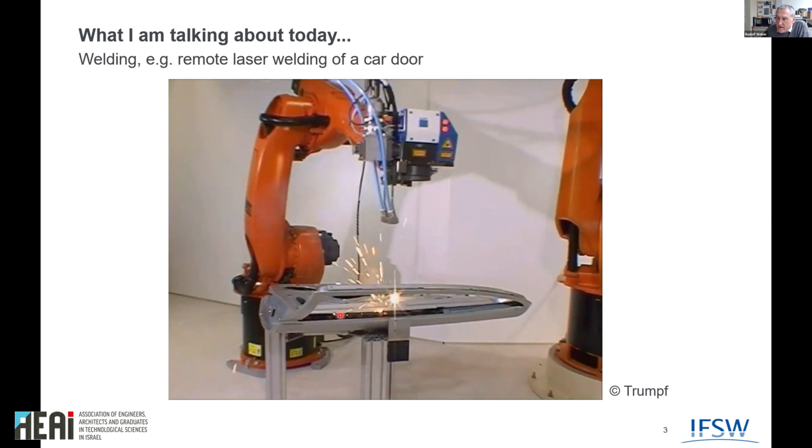Today it's mainly about welding, laser welding. This is a typical arrangement, from a film which was made by Trumpf a few years ago. We have the laser standing somewhere, and a light cable where the light goes into the processing optics. We have some protective gas here, and then at quite a big distance, up to a meter maybe, we have the sample. In this video, it's a car door which is welded, and that's how it looks. If you look at the process, the whole system moves around, and wherever it's getting bright, you see that welding is being done. Of course, today it's interesting to have a closer look at what is going on here.

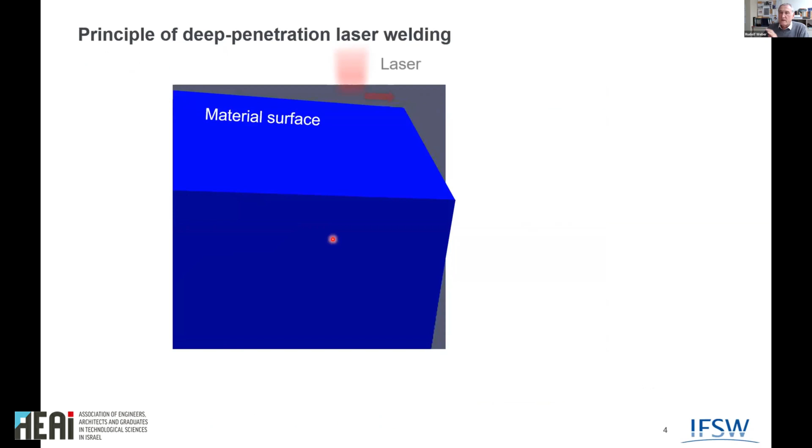As you might not be that familiar with this process, this could be the car door. This is the surface. We have the laser coming from top and moving slightly to the right. Let's go back again, because it looks nice.

Then you can see that we create some metal vapor. The laser heats the system up to boiling temperature. We create vapor, and the vapor pressure presses the melt away, creating a kind of capillary, as it's called. What is important with this capillary is it's quite deep, and if you look at the laser as rays, you can see there are multiple reflections inside this capillary, which means almost all the energy in the laser beam is coupled into the process, making it very efficient and very useful for deep welds.

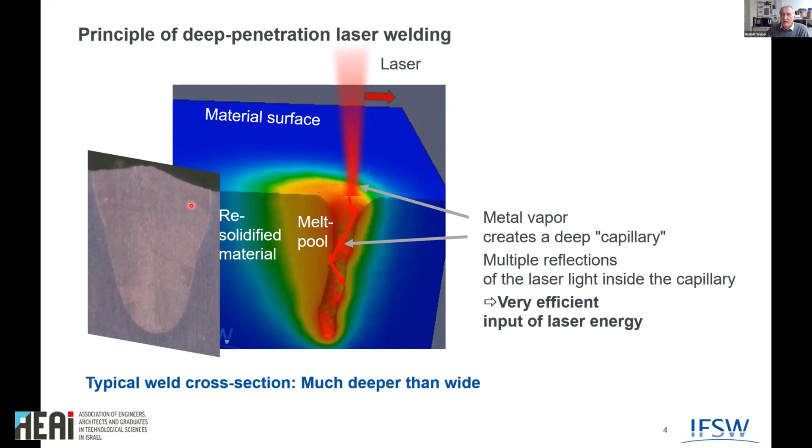We have some melt pool where the material is molten, and then after a certain time, during the movement, it resolidifies, and what we get is a weld seam, which might look like this. This is a typical cross section of a nice weld. This is the surface, where the material was molten. What you can easily do with laser is make it much deeper than wide, and this can be done very fast.

This introduction shows laser welding is very nice. It's a very useful process, and it's also very often used in industries already, as you might have seen with the car door. But it's also very challenging. If you look a little closer, you see there are a lot of fluctuations, which might yield wrong welding depths or wrong cross sections of the joint. This is one of the issues.

The other thing, if you look a little closer, you can see there is a nice crack building up at the end of the weld. Of course, usually you don't want to have such a crack. And also you can see there are big and small spatters emerging from this bubbling liquid, which is the metal surface. In my talk, this is more or less the contents.

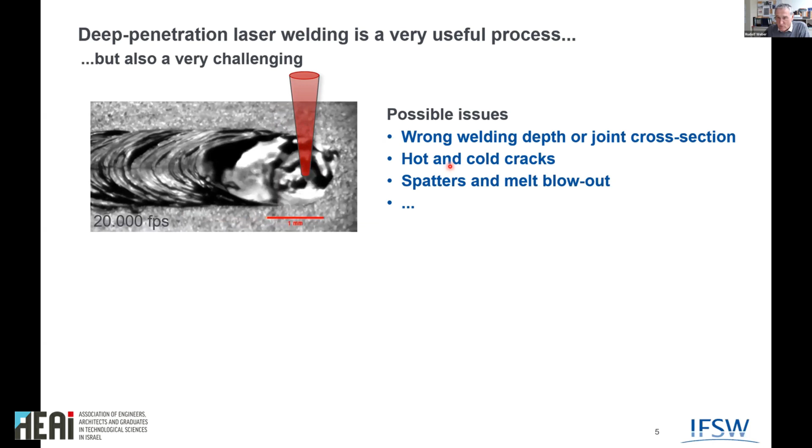I want to say a few words about these three topics, and of course, what's going on with the laser beam. If you have a closer look, today a typical standard parameter set has the laser focused with some top hat or sometimes Gaussian intensity distribution. This is really common, that's usually done. And on the other hand, the laser beam just moves linearly over the surface and doesn't make any additional movements or any additional power or intensity distribution changes during the weld.

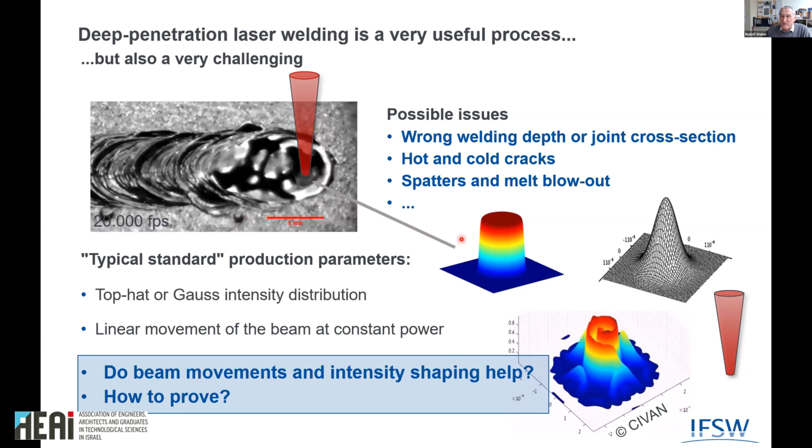What is interesting today is, does it help if you start moving the beam, or creating fancy intensity distributions to influence your process? And one of the questions is, how can you prove that it helps? For this, we are in the happy situation at the IFSW that we have what we call the IFSW X-ray facility, which provides insight into the process.

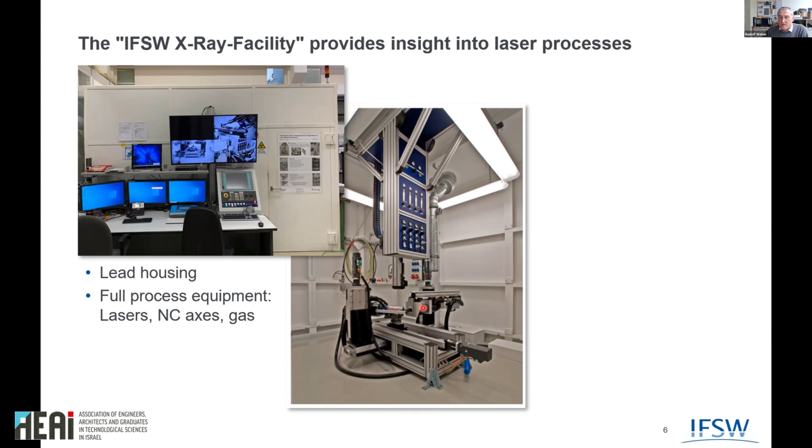This is a lead housing, quite big, with the commando, the operator's stage here. It's made of lead. Inside we have full process capabilities, including laser. Here the yellow thing is the light cable. Here the process head would be, and a lot of axes to move everything around. We have gas supplement to also work with process gases.

What is really nice about this is we have an X-ray tube, a point source X-ray tube, and a scintillator with a high-speed camera where we can X-ray the whole process during the process. And of course, we have other things like high-speed cameras, and finally we do image processing to understand what is going on.

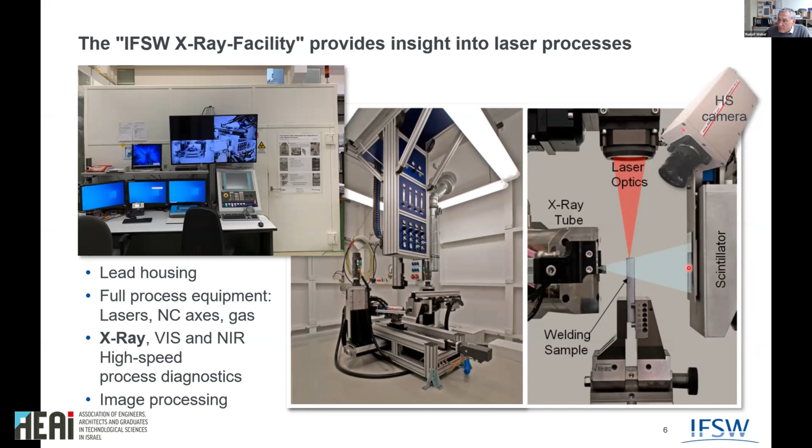And that's how it looks like. Let's go back one picture, sorry. Here you can see this is a typical sample. This is the surface, the laser comes from the top, the X-ray comes from the side, and the high-speed camera looks from the top. So what you can see here is the surface of the sample. In this case, it was aluminum.

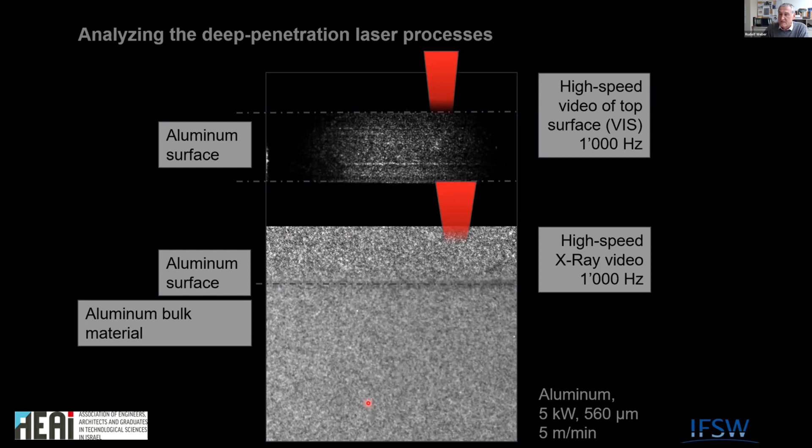And what we see here is the X-ray video, now also at 1000 Hertz. That's how it looks like. This is the laser beam coming. You see on the top, you get an explosion. The process starts, and we get a nice capillary.

So whatever is brighter, material is missing. What you can see is the capillary I've explained just before. Here the laser beam is coupled into the capillary and the system is heating up. That's what you can see now, that it's very fluctuating. We can see that whenever it's bright here, it's a kind of bubble or a kind of pore finally.

You might also see that the contrast is not very good. That has something to do with the complete X-ray system. Therefore, we have here a drilling. This is a mechanical drilling, which is filled with tungsten powder, which does not melt. And what you can visualize now is what's going on inside the melt.

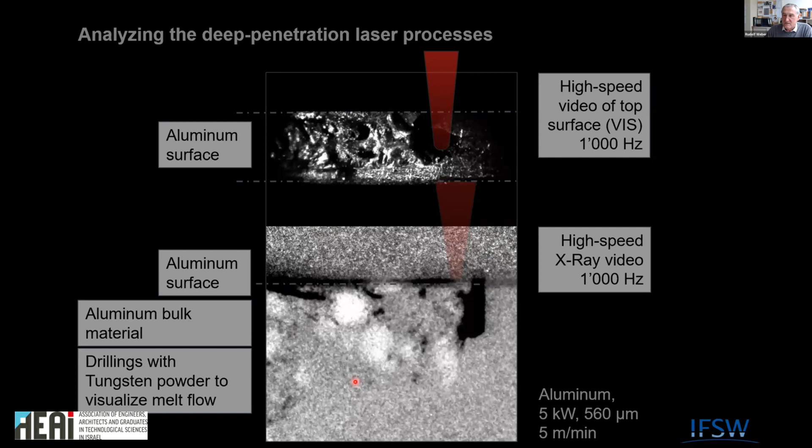So you see, whenever we go with the beam through this tungsten powder, you can really nicely see how chaotic, let's say, the whole fluid flow in this hot molten aluminum is, how you create eddies, and also how you create a lot much of pores. So this is an idea. You will see today a lot of such images and pictures that you get an understanding where we come from.

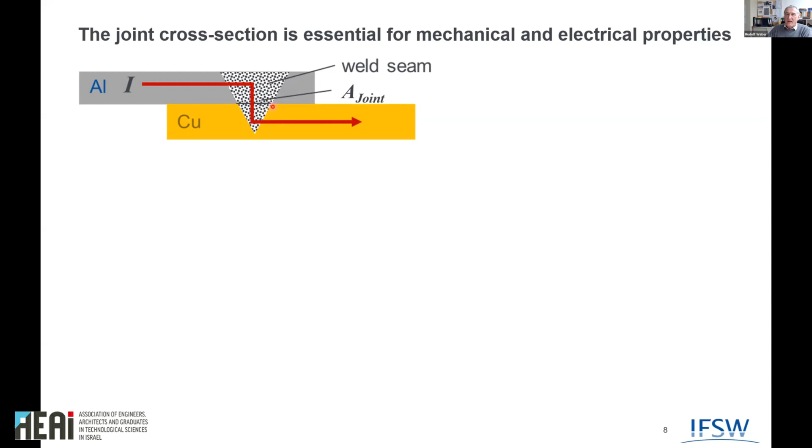So come now to what is the benefit of beam shaping. The first very, very simple example is shown here. This is one of the typical automotive applications of today. You have some aluminum sheet which should be welded to a copper substrate. And of course, the cross section here at the interface between the two metals is essential for the mechanical and the electrical properties of the whole system.

And if we have now this straight moving beam shown here as a sketch, this is what we end up with such a weld. So this is a cross section, the same as here, this grinded, that you can see what is going on. The darker material here is the aluminum, on the bottom the brighter is copper. And this, what you can see here, is the laser weld which was done. This was already a very nice and very good weld. You can see that only a few copper is molten, which is important to have a good conductivity.

But what you also can see is that the cross section is quite small, and also that the copper is distributed all over the weld. And now what you can do is the most simple beam shaping, or one of the most simple beam shaping things, is you do wobbling, which means that during the moving of the beam, you have an additional movement of the beam perpendicular to the direction of movement.

So this then ends up with a quite wider weld seam. Here are the parameters for those who are interested. You can see that the beam is moving here from left to the right, while the whole beam then is moving from bottom to top, while the whole thing is moving to the right. And this is how then the weld looks like. If everything is adjusted well, you can see that...

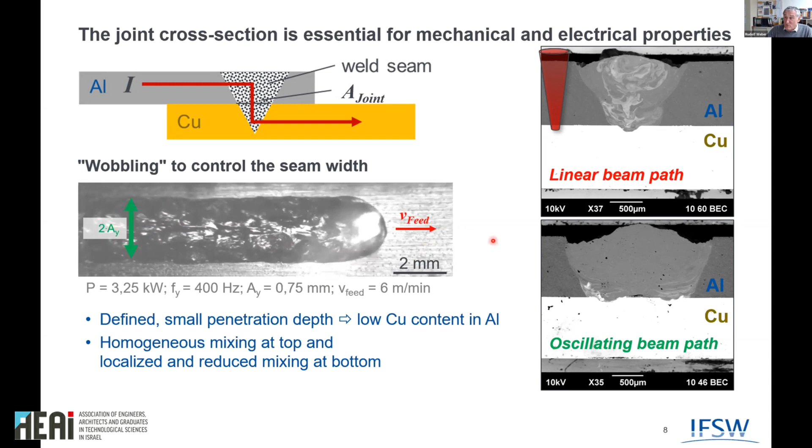If we just wobble, nothing happens. So it's really important to have the correct parameters. So we have a defined penetration depth, much more defined than here, and we have quite homogeneous mixing, which means we can really improve the mechanical and the electrical properties of such joints.

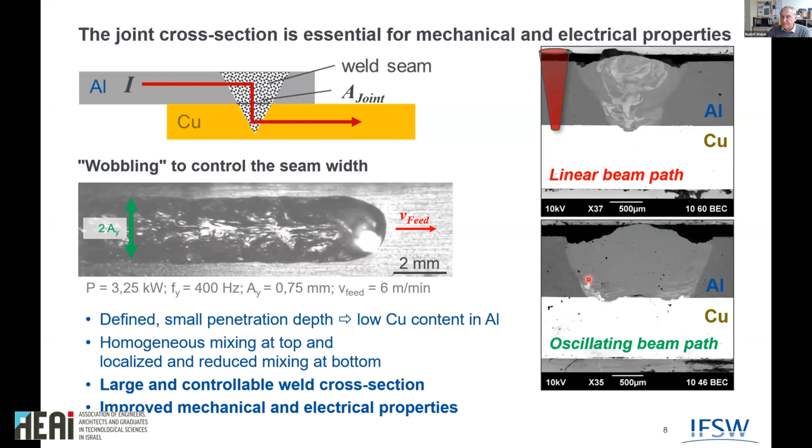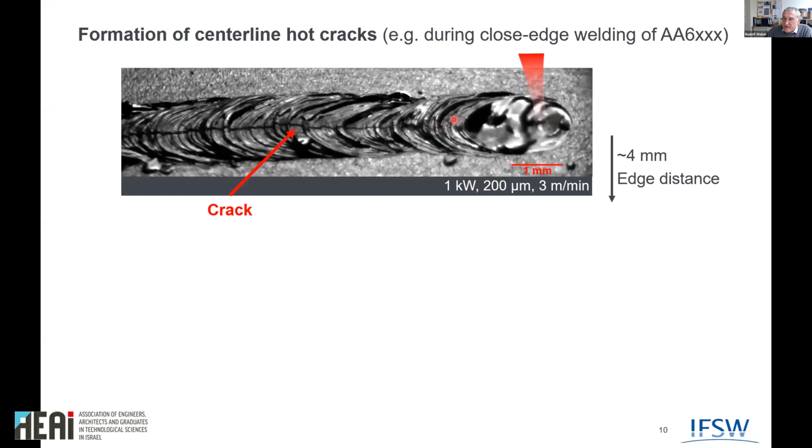The second thing I would like to show you is the formation of hot cracks, which is also a quite important issue that mainly happens if you do close edge welding of aluminum alloys, which is mainly in car doors. Modern car doors are made of aluminum. If you are close to the edge in a few millimeters distance, that's what happens if you do just a straightforward weld. You can see that really very short after the solidification here, a very nice, very big crack opens.

You can make this cross section with Barker etching. Then you can see the material structure which comes up. We have a narrow band with equiaxed dendrites, so-called, so kind of balls, and we have a kind of fingers here pointing to the center, which are called oriented dendrites. And the problem is, if this zone is very small or even does not exist, then we have these two fingers being very close to each other, which then very much favors the arising of such hot cracks because the mechanical strength is quite low.

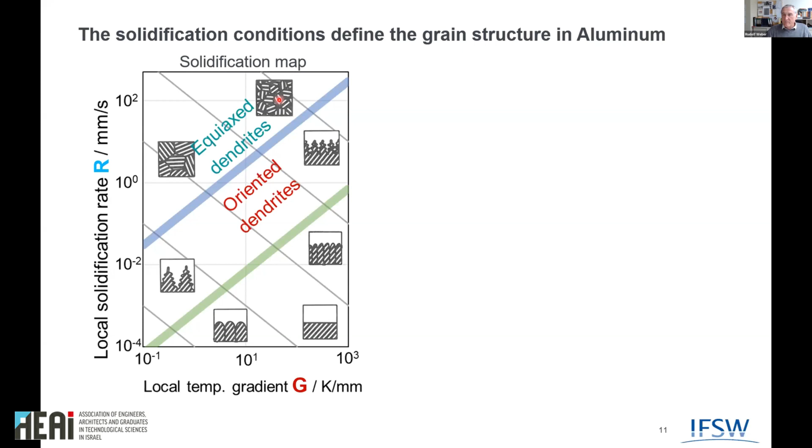To understand how to solve the problem, you must do some material science—just a short look at the solidification map. Here is the solidification rate R in millimeters per second, and the local temperature gradient G in Kelvin per millimeter. We can create a map where in this part we get equiaxed dendrites, and in the lower part we get oriented dendrites. If you want strong, stable welds, we must come into this range. The question is how to get there.

Understanding what is going on is not simple, so it takes a big effort to find out. Again we use our diagnostics: we look from the top at the weld, and from the side at the weld. With correct image processing, we can define the solidus line from the top and from the bottom—where everything is liquid, and where everything is solid again.

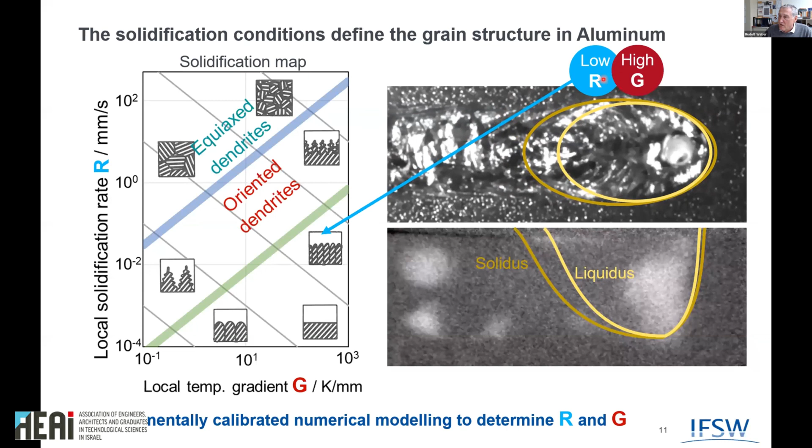Now I want to show we do some numerical modeling, which we calibrate with these films, and then we can determine the local R and local G. You can see that on the side we have a low solidification rate but a very high temperature gradient, so we end up in the region with oriented dendrites. At the back of the weld we have a high rate and a low temperature gradient, so we end up here. The trick is to adjust everything, understand the process parameters, and really get here and here. This can be done.

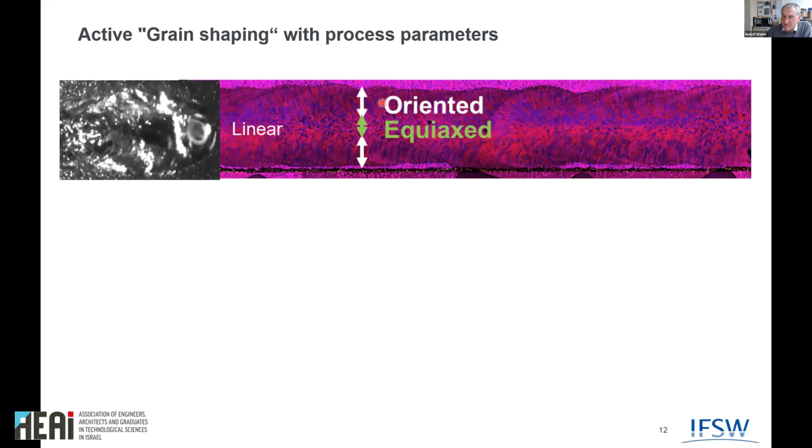This is again the linear weld I showed already—small equiax region and a large oriented region. Wobbling is one of the first means you can apply. What you see here is that the oriented part stays almost constant, it does not grow or diminish, but by doing the right wobbling, right power, right feed, and so on, you can achieve a much larger area of equiaxed grains, which means this weld is much stronger than that one.

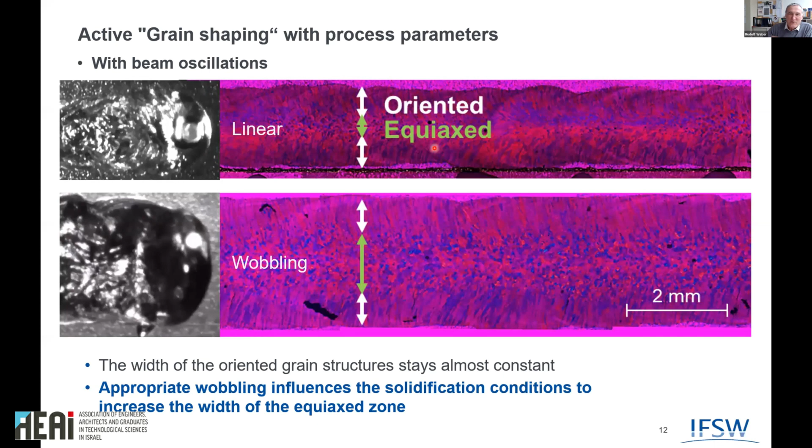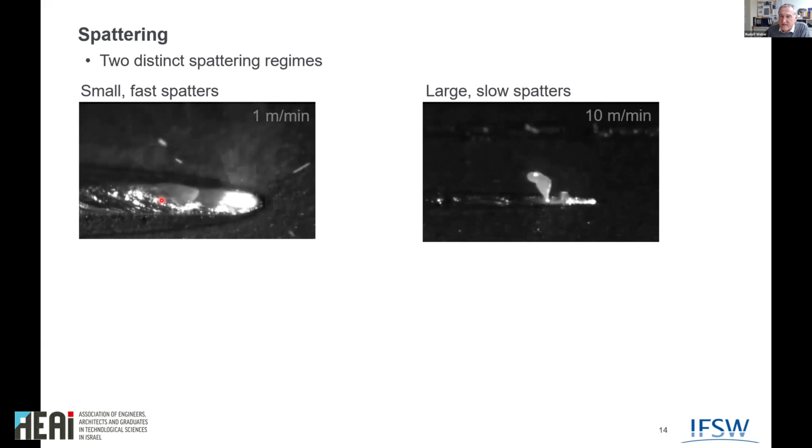The third thing I wanted to show is what happens with spattering. I showed you this is a very fluctuating process. Typically there are two regimes where spattering occurs: here we have small fast spatters, emerging from the melt pool very fast, and here we have a lot of big drops. Sometimes this is bad, sometimes that is bad—however, usually people do not want to have spatters at all.

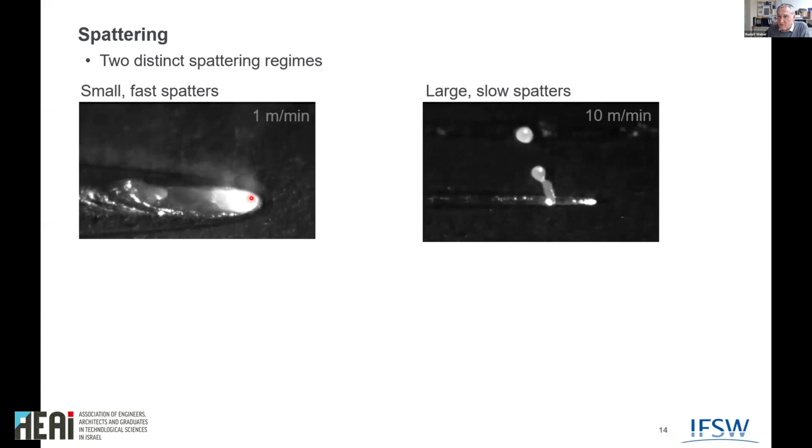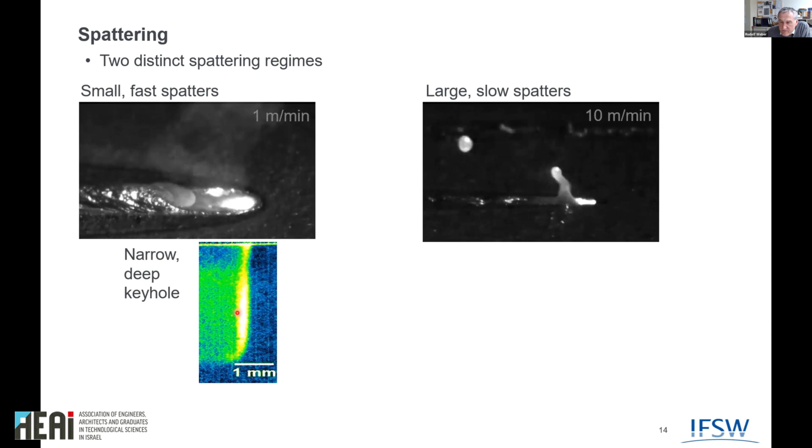If you look at the X-ray again, now in false color, you see that in this case we have a very deep and very narrow keyhole. If the keyhole is so narrow, the vapor created down there by the laser has to emerge very fast—you all know Bernoulli's law. If the cross-section is small, the vapor emerges very fast, causing friction on the surface and tearing away small droplets from inside the capillary. So in this case we have a lot of small, fast spatters.

This is completely different. Now the capillary is wide and inclined a little bit to the back. What I cannot show, but you have to believe me, there is a strong eddy behind the capillary, which is not the case here. A very strong eddy which moves the whole liquid up, and if the surface tension is not enough to hold back the liquid, you see that we have really large droplets which just blow out here of the complete system.

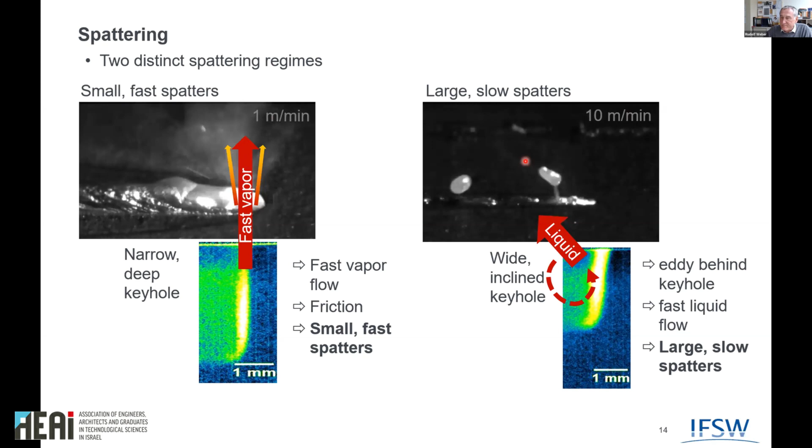So with the large and inclined capillary at higher speeds, you have to compare the welding speeds also, we can create these large bubbles. And now to another system of beam shaping.

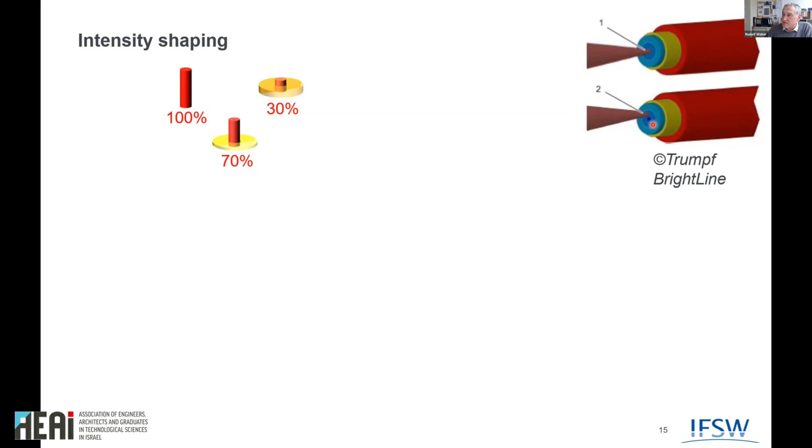Even larger doesn't make sense. And if you now look at the number of spatters for these three intensity distributions, you see that here we have very much spatters where 100% is in the inner part. Here at 70, when you have a little bit around of the hot spot here, a little bit around, then it dramatically drops, and then it comes up again if you have the large spot.

And it's not very surprising that I was showing these images before. So this is the capillary which was created when everything is in the inner core. This was the capillary which was created at the higher speed when everything was in the outer core. And in between, and you remember here we had fast and small spatters, here we had large and big spatters.

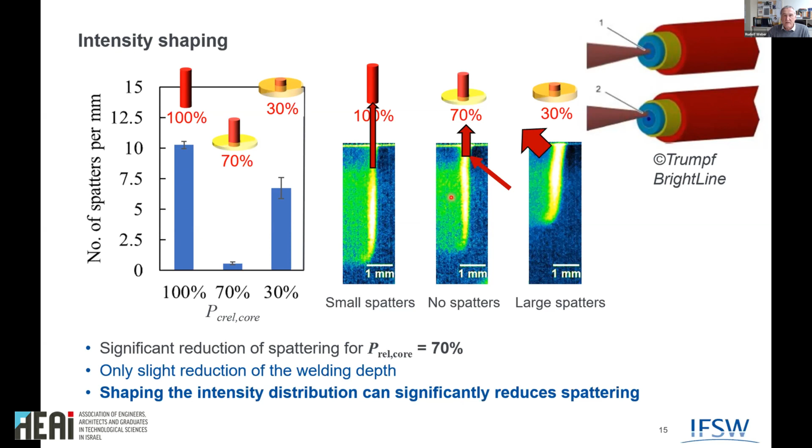So there is of course a stage in between where we, with this small ring, we slightly open the capillary, which means the flow velocity dramatically drops, and the number of small spatters is decreased, of small fast, and the large did not come yet because the capillary is still narrow and deep. Very simple, very effective means to reduce spattering.

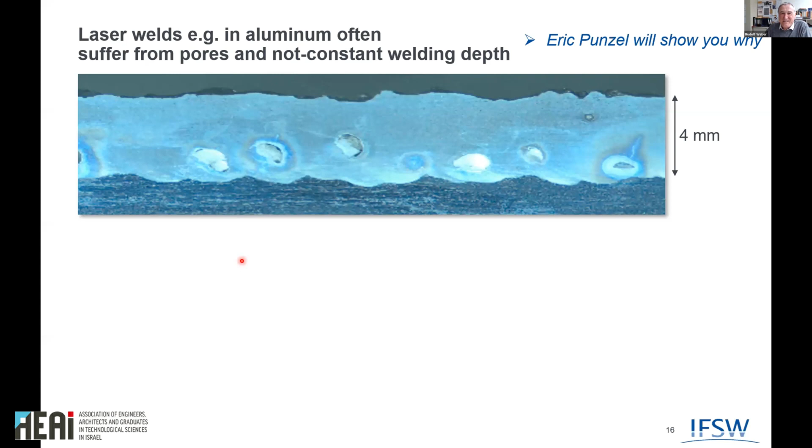And the last thing is only because it's nice, I would like to show you. We also had a lot of pores, and Eric Punzel will then explain everything about pores in his talk after myself. But I have a film which he does not have.

That's how it looks inside such a weld, by the way. You create a lot of pores. This is typical automotive weld parameters, 3.4 kilowatt, 4 meters per minute. So that's how it looks. You also see that it's not very constant.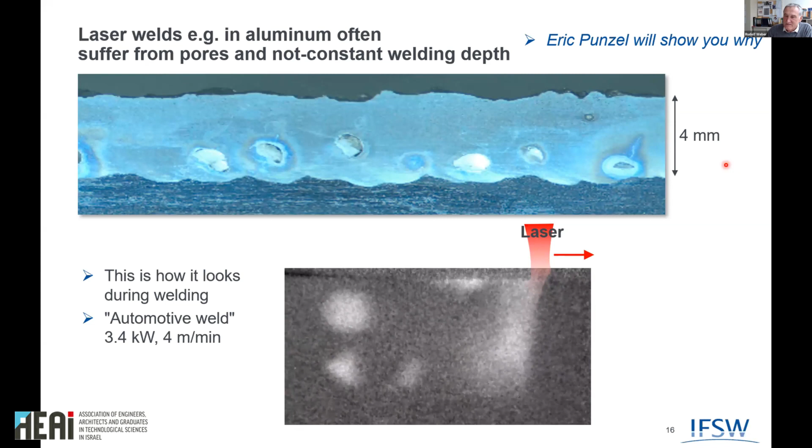However, the nice thing is, another possibility is some circular wobbling. You just move the beam around. That's how it looks like. These are the parameters again, 200 Hertz was nice, and that's how it looks inside the weld then.

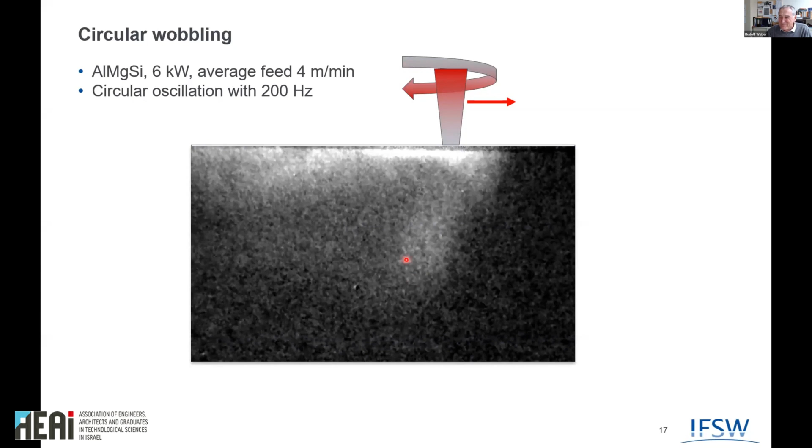And what you can see is that the capillary is here moving around. This is the capillary here. And at a certain point, a pore is created. And after the next round, you see that the capillary is coming back and eats up the pore again. So you can create the Pac-Man, or there might be some older people among you who still know Pac-Man. It really looks like this.

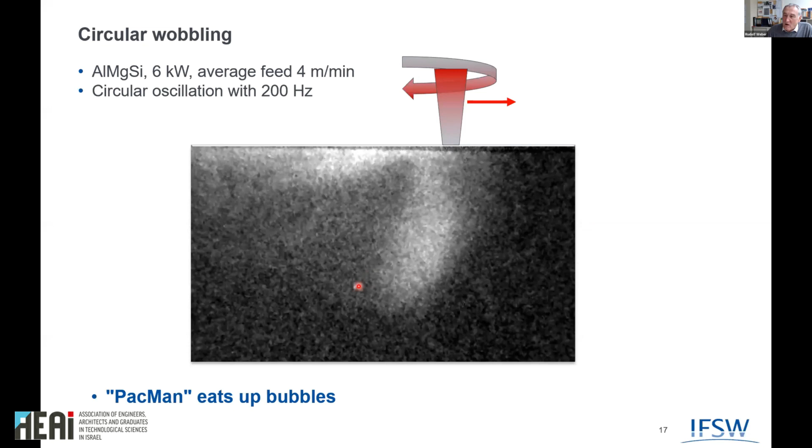The serious message for this film is, even when you create pores with the appropriate means, you can go back and outgas. Pores only exist if you have gas in, you can outgas the pores.

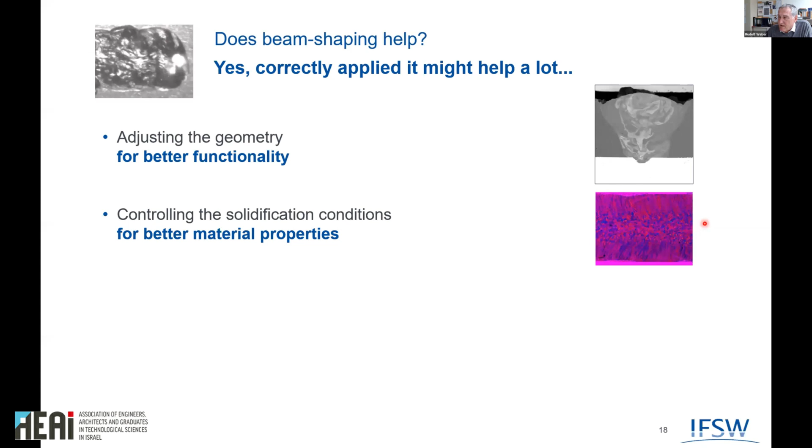So, does beam shaping help? Was the question in the beginning. I think yes, it helps really a lot. For example, very simple, you can have better functionality. You can influence how you solidify the grain structure that you create, and you can also very strongly reduce spattering, and pores will be shown then later on. So I think this is my opinion for today, that beam shaping is really the means which is absolutely necessary. I mean, it's not only my opinion, it is necessary to get really perfect welds in future.

At the beginning, I would like to introduce my company, BBW. After that, we will talk about the generation of process pores during laser deep welding, and shortly about known strategies for decreasing pore generation. Then I would like to present some experimental in-house results for laser welding with variable power distribution using a 2-in-1 fiber, the Brightline technology we already saw in the presentation before.

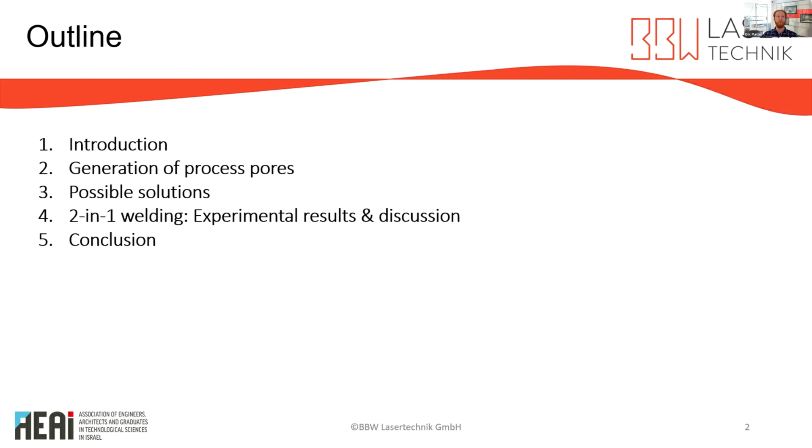Something about BBW Lasertechnik: we are a company in the southern part of Germany, in Bavaria, near the Alps. The company was founded 23 years ago, and assigns itself as a pure job shopper of laser material processing. Our main topics are laser welding, cutting, drilling, marking, and USP processing.

BBW started in a room with just 40 square meters, and has made several moves and extensions since then. With the finished building of the fourth production hall last year, BBW now has more than 8,500 square meters of production and office area.

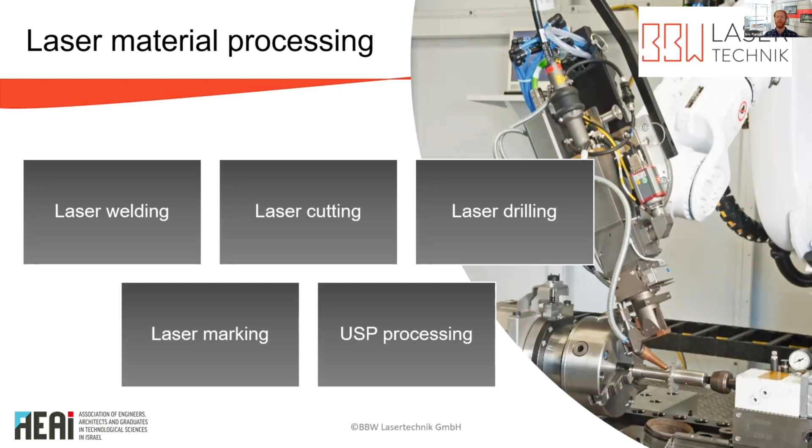We currently have 150 staff members and around 43 laser systems, and two-thirds of these laser systems are used for laser welding. A significant part of these systems are not purchased complete solutions, like from Trumpf, but built internally. To ensure part reproducibility in a series, we also have an internal construction department for fixtures and a quality assurance department, including a metallographic laboratory. Most of the results you see today come from in-house production and our metallographic laboratory.

Last but not least, the process development team, where I've been part of it for 3 years. We accompany feasibility studies and process development for new prototype components. Compared to a university or institute, our work mainly focuses on production improvement, but we also take part in R&D projects together with partners on national and international bases.

So far, this was something about the company. Now let's go into the main topic. We have already seen very nice theoretical and practical views into laser deep welding, so I can skip some things.

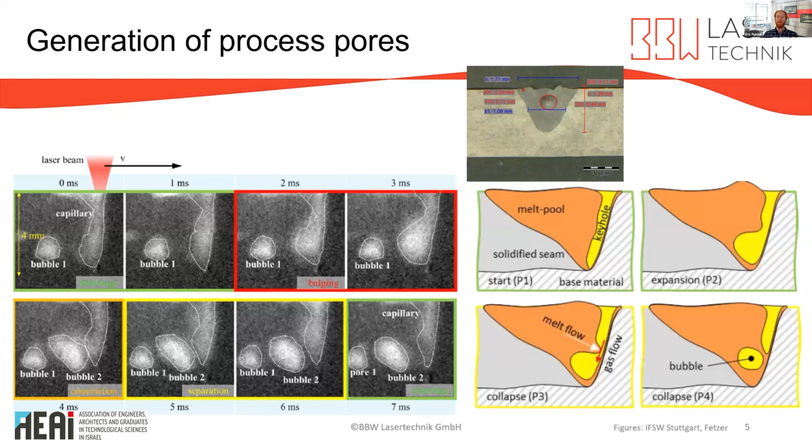Pore inclusion is one of the critical welding defects and will affect the strength of a part. So the mission is clear: we need to avoid pore inclusion completely, or when that's not possible, decrease the porosity in the welding zone, the fusion zone.

So there are different strategies against pore formation, and I want to show you some of them.

Some are already well investigated. One of them is wobble welding. We have already seen how wobble welding works, so I just want to show you what happens when we use wobble welding for the decrease of porosity.

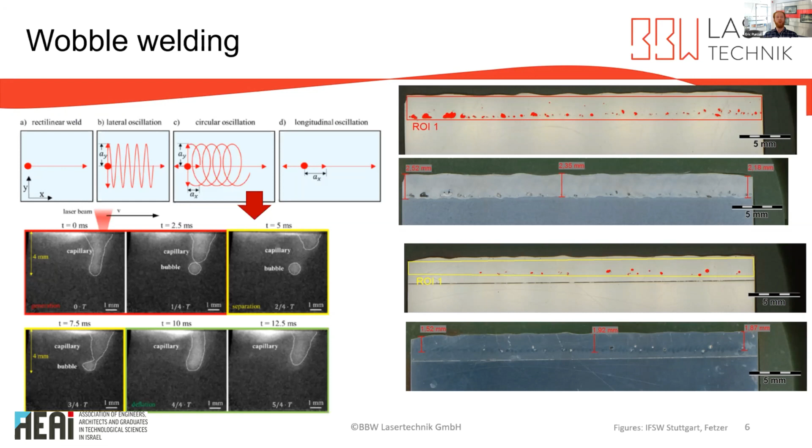On the right side, you can see some cross sections we have made. On top is a cross section for a weld seam without the wobbling technology, with a relative porosity of around 2.5%. On the bottom is another cross section for a weld seam with exactly the same parameters, but with additional wobble technology. Here the welding depth is a little bit lower, but the porosity is significantly decreased from 2.5% down to 0.6%.

Another possibility is high-speed welding. This also reduces several weld irregularities. Again, some X-ray analysis from the IFSW Stuttgart: we see here a widening of the vapor capillary, which leads to a more stabilized capillary itself. Fluctuations of the capillary decrease with increasing feed rate, and the capillary opens more.

At 50 meters per minute, there is a completely different geometry. This could be a huge presentation itself about this topic. So what was achieved here is nearly no pore generation, but there are other disadvantages at this speed.

We go into a regime where humping effects occur. There's also another disadvantage when we weld a material with a hot cracking tendency: we have the problem that the hot crack tendency increases mostly with higher welding speed.

Here we see another possible strategy: the usage of a superimposed intensity distribution by different laser spots. The idea of the so-called double focus technology is the widening of the vapor capillary for better keyhole stability, and it requires either the splitting of a laser beam or using two different laser beams, or a laser source which is able to create multiple spots very quickly.

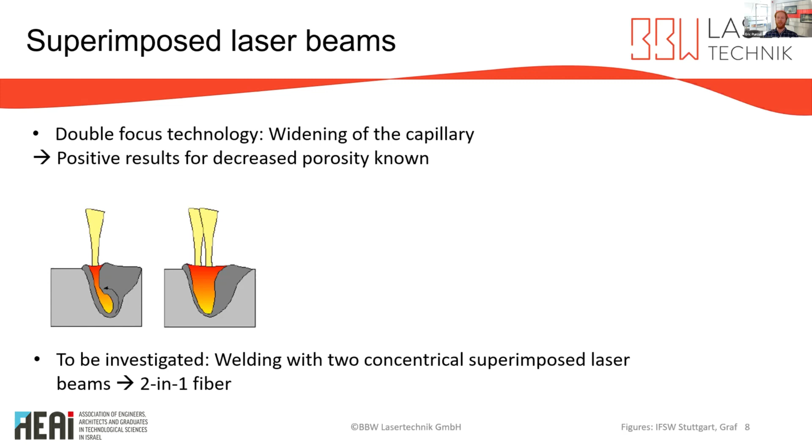We have already talked about this. The approach here is that BrightLine is just one technology, from Trumpf. There are also other technologies which do mostly the same, like AMB from the company IPG, ARM from Coherent, or Corona from NLight. It's really called Corona.

The idea here is we have a variable power distribution between a core and a ring fiber using the 2-in-1 fiber. So this promises improved seam quality, reduced spatter formation. We have seen already that it reduces the spatter formation and increases welding depth.

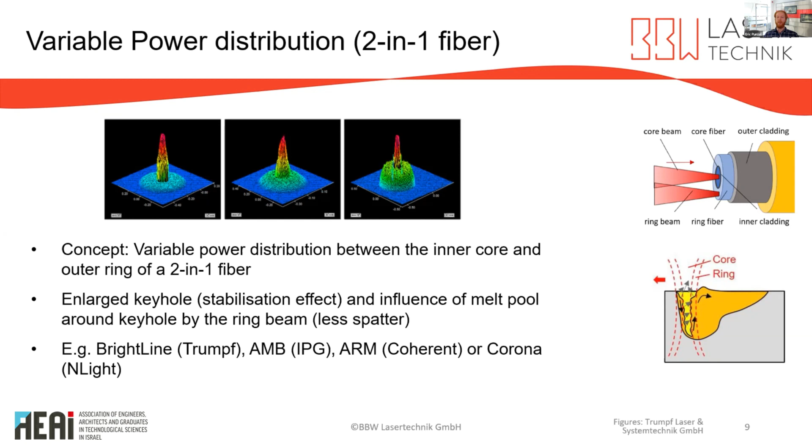During laser deep welding, a widening and stabilization of the vapor keyhole is realized due to the power distribution of the ring fiber. So the molten material around the keyhole is influenced by the ring beam power with a contrary impulse and deflected to the backside of the keyhole.

For our experimental investigations, a Trumpf TruDisk laser with 4 kilowatt and a BrightLine weld module was used. The laser beam was focused to a spot diameter of 200 micrometers for the inner core and 800 micrometers for the outer ring fiber.

The power distribution between inner core and outer ring can be varied from 100 to 0, to the opposite, 0 to 100. For our investigations, we used a very low welding speed of 2 meters per minute.

At this speed, you get images like this. Of course, this is not optimal for low porosity, but we can see here very well an improvement when we change other parameters.

The upper left figure gives an example of different power distributions that can be generated with a dual core fiber. Since the diameter of the inner core is much smaller than the outer ring, the intensity in the inner core is usually much larger than in the outer ring.

For example, a power distribution of inner core to outer ring of 75 to 25%, with the configuration shown in this table of 900 watts to 300 watts, leads to an intensity distribution of 29 to 1.

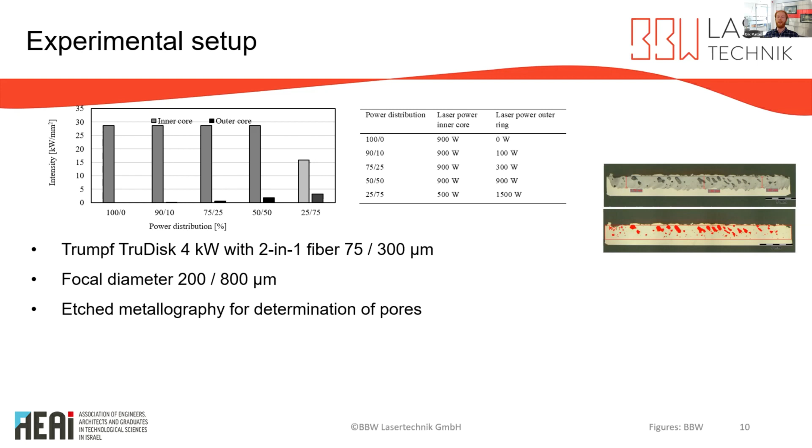In order to determine the influence of power distribution of inner core and outer ring on penetration depth and weld seam width, the power distribution is varied while the laser power of the inner core is kept constant at 900 watts.

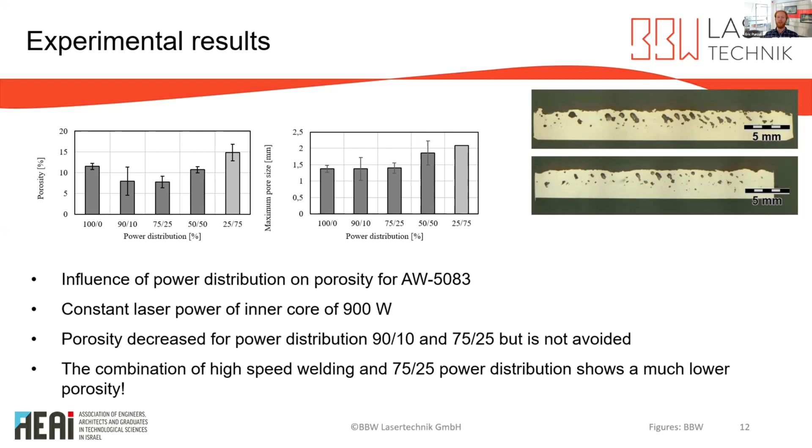The porosity can be improved further, and we must do this by combining with other strategies, for example high-speed welding. This is what we can check here.

We went into a very high-speed welding profile. We used a welding speed of 26 meters per minute and a power distribution of 75 to 25% with the 2-in-1 fiber, enabling here almost no pore formation. We did different cross sections.

Unfortunately I have no longitudinal cross sections for this presentation. But as mentioned in the beginning, we could come into another process window with higher probability for hot cracks for some aluminum alloys, which is exactly the example in this case. So for understanding, we milled down the surface near the weld seam, and we can see small micro cracks in the weld seam.

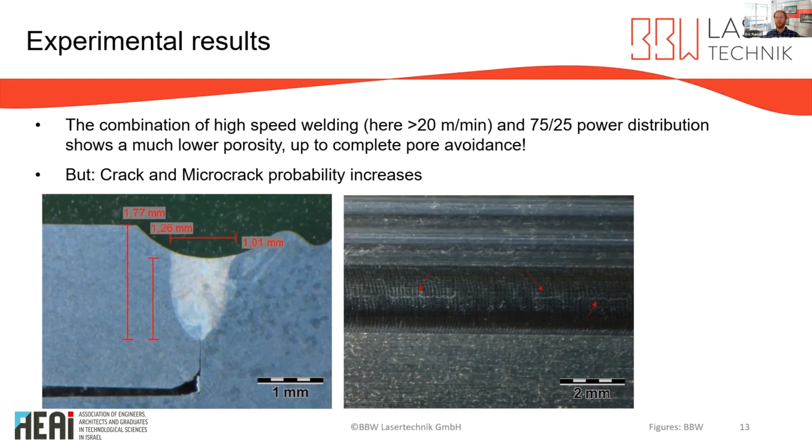Therefore, process development is very often a balancing act, finding the right process window.

In conclusion, in terms of welding quality regulated by welding standards like ISO 13919 for aluminum, we separate between different quality classes B, C, and D, meaning decreasing quality from B to D. We achieve, just with different power distributions, an improvement from 12% porosity to 8%. This would improve the quality from not acceptable to class D according to the ISO standard.

Since pore formation predominantly occurs at the bottom of the keyhole, the application of flexible power distribution can reduce porosity but cannot avoid it completely. Here we must combine this strategy with another strategy. The results show that penetration depth is also primarily dependent on the laser power of the inner core due to much higher intensity, and it is assumed that the reason for the reduced porosity is a reduced vapor velocity due to an increased keyhole opening.

So I hope I could give a little insight into pore generation and how it could be possible to decrease the porosity in a weld seam. I'm open for questions, I will read the questions in the chat, and later we also have some time for talk, I guess. Thank you very much for listening.

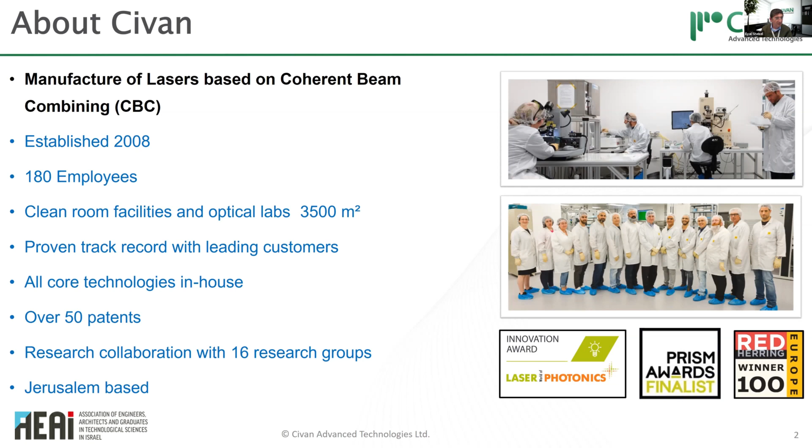We've been selling lasers for many years, so we have a good track record with many leading customers. We're what's called a vertically integrated company, meaning all the core technologies are done in-house. We have many patents, and we do a lot of research collaboration.

I would like to talk about our OPA laser. OPA stands for optical phased array, a type of coherent beam combining. What we provide is high power, single mode lasers with dynamic beam shaping. When I say high power, I mean tens of kilowatts.

Single mode - I will have two slides to explain what single mode is for people who don't know. And then I will elaborate on the dynamic beam shaping.

I want to use this slide to make two points. One, as was presented by the two speakers before me, beam shaping helps the process, but it was also clear and mentioned several times that you have to adjust the parameters. It's not so simple to take one beam shape and suddenly everything works. For every process you have to adjust the right parameters. Everything you change - speed rate, thickness of material, coating, consistency - everything needs adjustment. We are the only company who allows adjusting these parameters very dynamically, as I will explain.

Another thing shown is that when you increase the feed rate, it's much better for porosity, for example. You get better results when the feed rate is higher, but when the feed rate goes higher you also need more power. So the ability to provide all this at very high power is also very important. When I say very high power, we can provide many tens of kilowatts.

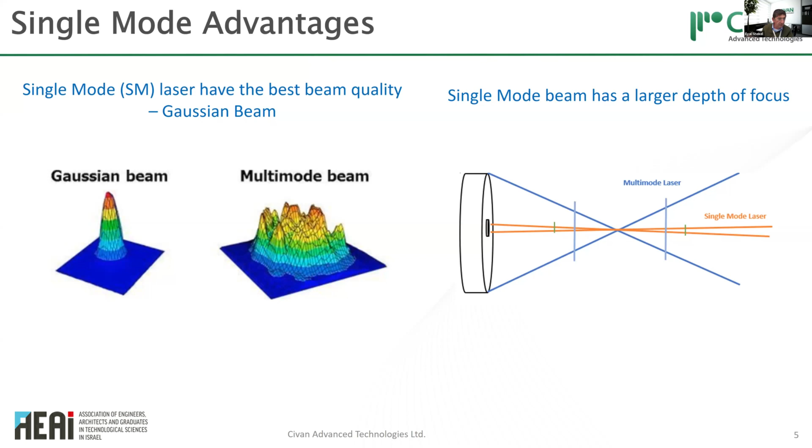What it does is, first of all, allow a very small spot with a very deep depth of focus. The beam is focused to a small spot, not only at one point, but also plus or minus a few millimeters, which helps a lot in the process.

Another thing is, because of the low divergence, it allows you to work from very far. This is a picture of our application lab, where the laser beam comes out from here and goes 3 meters until the workpiece. So this gives a lot of flexibility, the fact that you can work at large distances.

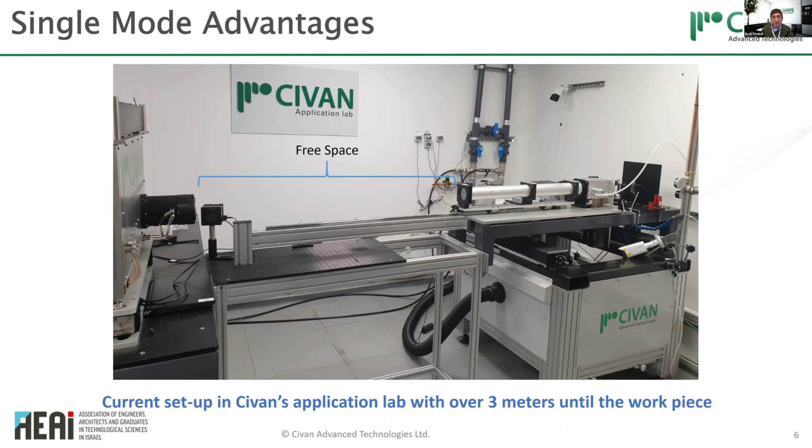So what is the dynamic beam? Dynamic beam shaping is the ability to manipulate the beam shape. Now, what exists today in the market, as was mentioned, is the Corona or the ARM of the different companies, which allows a combination of a small spot with some kind of ring shape, and to change the ratio of power between the spot and the ring. But this is the extent of the flexibility available.

Another way to do beam shaping is with fixed optics - either regular optics or a DOE - and you can make different shapes. The problem is that once you design a shape, you design the optics, you get one shape, and there's no ability to change that shape.

The third method is using mechanical scanners. I think some of the results that Professor Weber showed with wobbling were actually done with mechanical scanners, but they have the limitation of speed in what they can do. They also have the limitation that the beam basically goes continuously from point to point.

There's only a limit of what shapes you can do, and the higher the power, it's more difficult on the mirrors to handle very high power. What we do in Civan is dynamic beam shaping using electro-optical effect, coherent beam combining, and really, you can design any beam shape that you want. Basically, it's like using the laser as a pencil and drawing whatever picture you want.

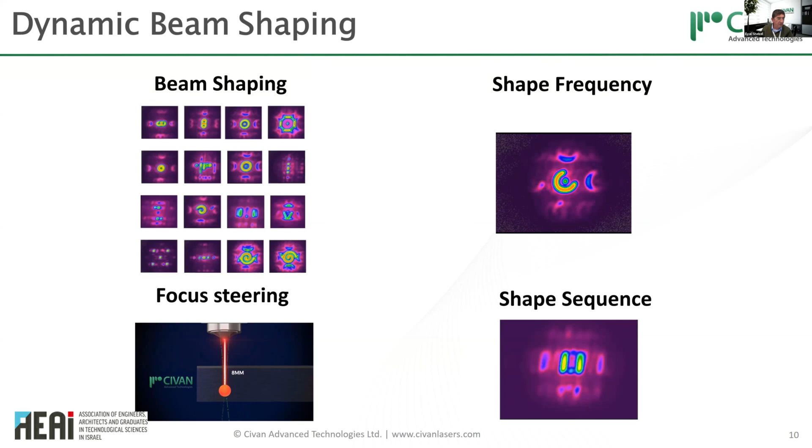Also, there's the ability to do a sequence of shapes, meaning you can take different shapes and do them one after the other with just microseconds between them. So it's really like a whole sequence of shapes one after the other. And the last thing is the ability to change the focal point of the laser, again in real time at very fast speed as you do the process itself.

So I'll say a few words about each of these four categories. First, about the beam shaping. We see here 3 examples, all bead on plate of 3mm stainless steel, where the only difference between these cross sections is what beam shape we used. It's clear to see that each beam shape has a different effect on the material.

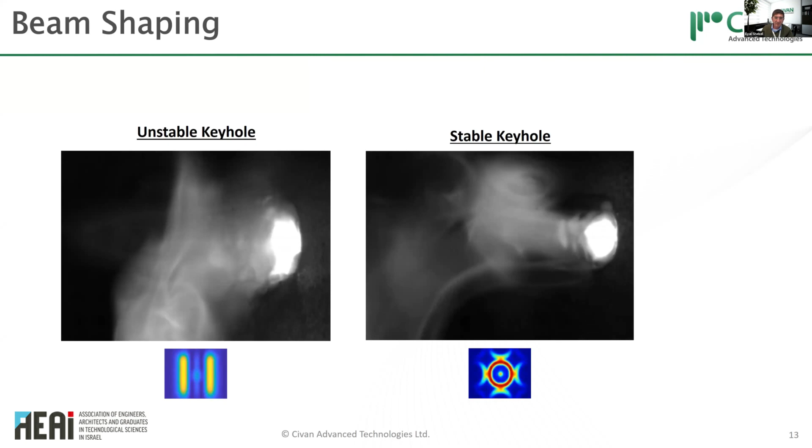It really depends what you try to achieve. Some people have different requirements for different processes, but it's very easy to go from one beam shape to the other. Another example, again from our application lab, shown a lot before - you see a spatter coming out compared to a very clean, spatterless weld over here.

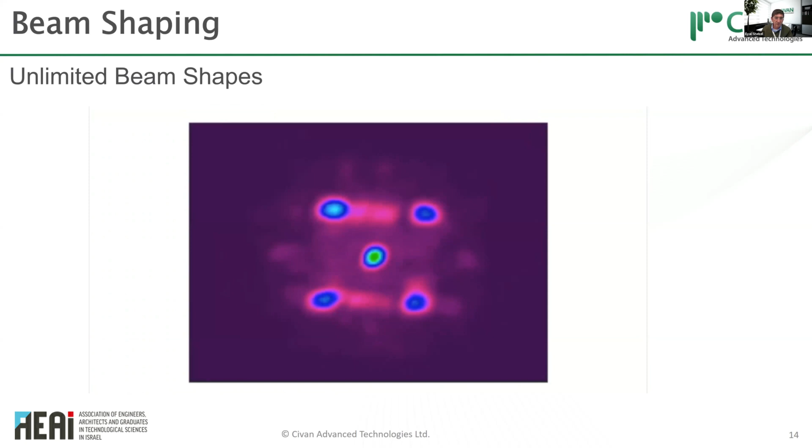So to do the different beam shapes, we have a very simple software. You go with the mouse and click in a few places, and automatically you see a simulation of what the beam shape is going to look like. You just save the file, upload it to the laser, and you have the beam shape in the laser. It really takes minutes to design any beam shape - you get exactly the simulation of what it's going to look like, save the file, upload it to the laser, and use it whenever you want.

Kind of steer the melt pool as you go. As was shown, you can go back to places and take out pores that were captured there, and so on.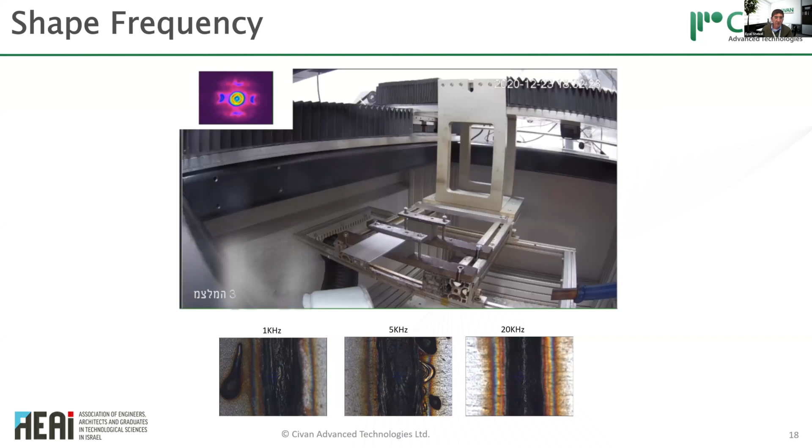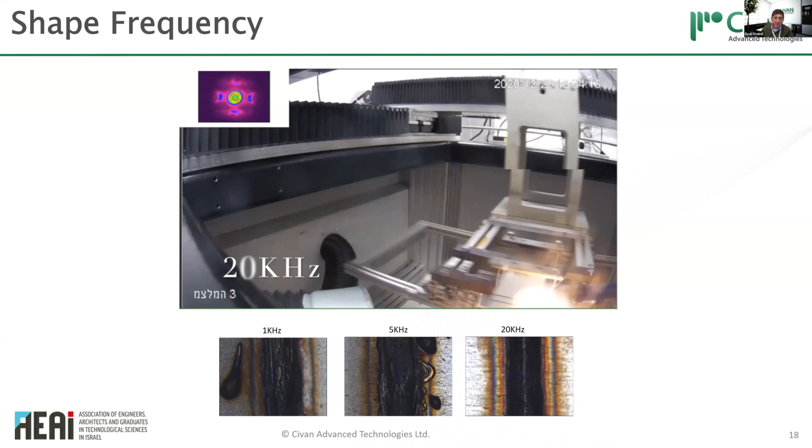The point is just that it's flexible - you can really in a minute change the parameters and get different frequencies and different cross sections. This is another example of doing 3 different frequencies. You see this is a circle at 1 kilohertz, 5 kilohertz, and 20 kilohertz. Every time it passes by, you get another bead on plate, and you can clearly see there's a different behavior of the weld.

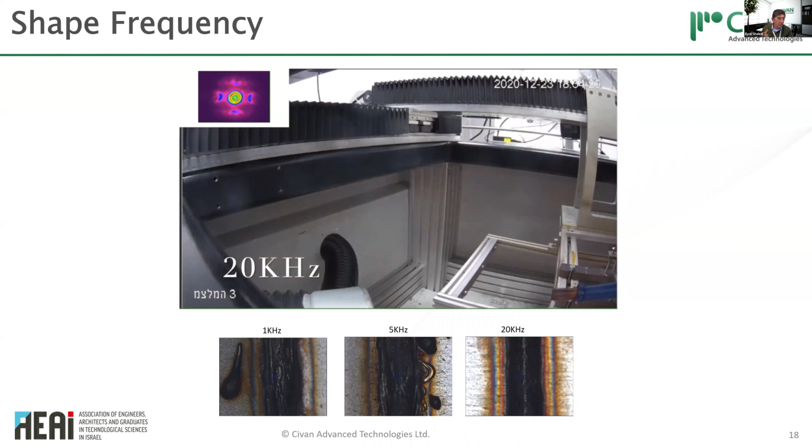You see here the line was created. You go again, you get another one, and so on. Really, changing the beam shape between one test and the other is just a click of a button, or you can reprogram it in advance.

Another example of this beam steering is similar to what Professor Weber showed about welding aluminum to copper. We have a very nice weld here with very little intermetallic mixing, a nice wide weld using this infinity shape. So it's similar to the mechanical wobble, but here we can do it at any parameters, any speed, any width, just by a click of a button. Going from one type of weld to a different type is just changing the cross-section, and here we have a very deep penetration weld.

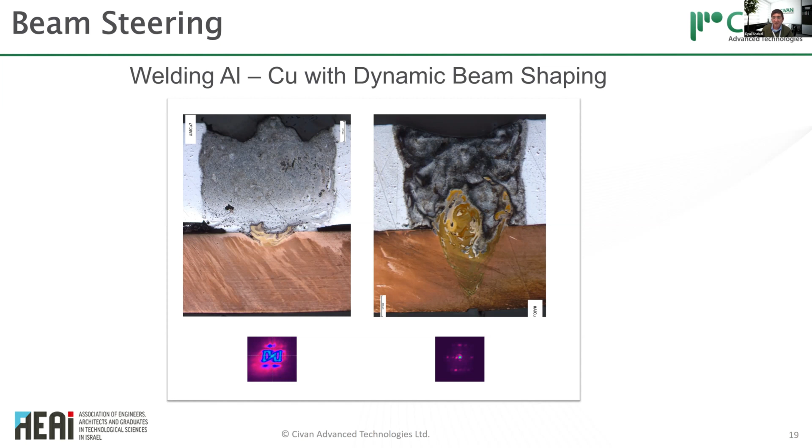Now I'll talk about sequencing. The idea is that you make a set of different shapes, say 6 of them—two lines far apart, a little closer, and so on. You draw these shapes, save each one, and then make them play one after another at whatever frequency you want, changing slowly or quickly between them.

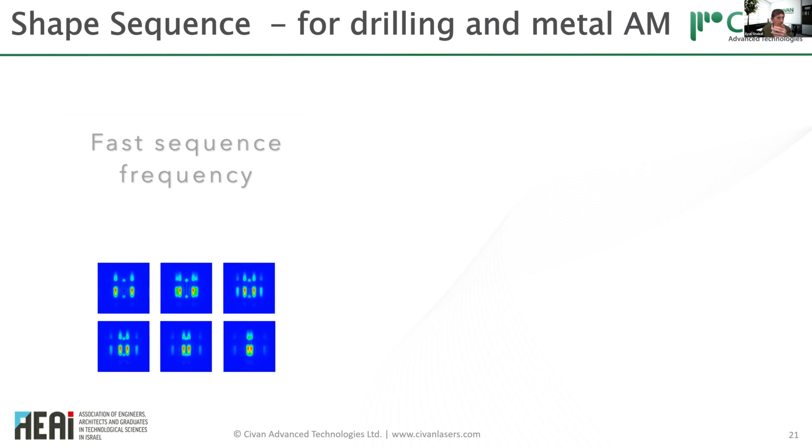Everything shown here is just for the presentation. In reality, you're talking about kilohertz, tens of kilohertz, or megahertz—you can have a microsecond between each shape. So these changes in shapes are very fast and controllable.

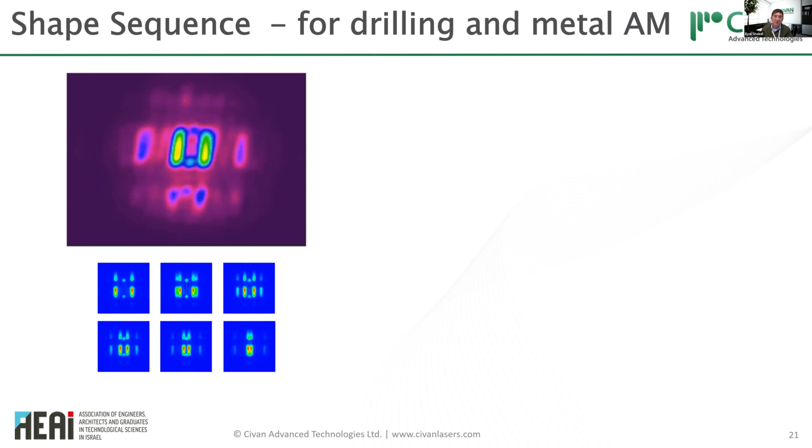So where are examples where one might want to use this? First, you can make very complex beam shapes, happening at tens of kilohertz or megahertz, and control the melt pool in a very sophisticated way. You don't just wobble it around—you can really stir the melt pool however you want. This is just an artistic example, but any shape is possible. By the way, all these images are captured from our laser at 10 kilowatts.

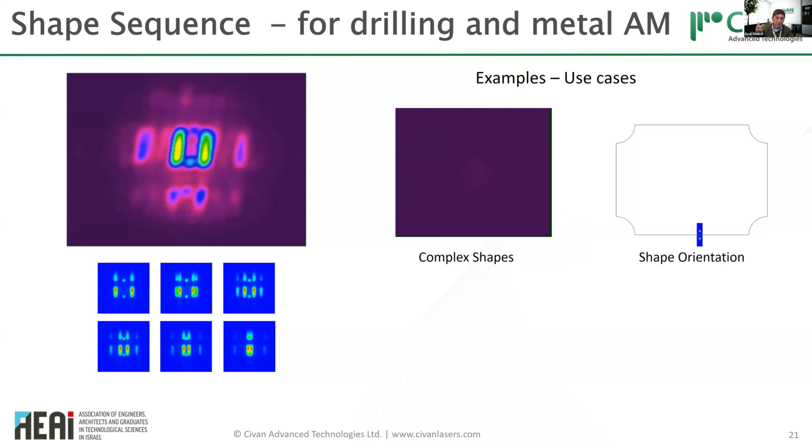Another very important use for sequencing is this: in additive manufacturing, if you decide a good beam shape is 2 points, but you move along a trajectory on a part, the orientation of these 2 points always has to be perpendicular to the propagation direction of the laser. So you need to rotate the beam shape, and this rotation can be pre-programmed and done automatically in real time by the laser.

The last example for the importance of sequencing: drilling a layered material, like metal with ceramic on it and glue in between. The beam shape and properties going through the ceramic versus the metal would need to be completely different. If it takes 200 or 300 milliseconds to drill the whole thickness, you can change from one beam shape to a second to a third during the drill—every few milliseconds, a different shape. I think nobody can get even close to this ability of changing beam shape in a few milliseconds during a drill.

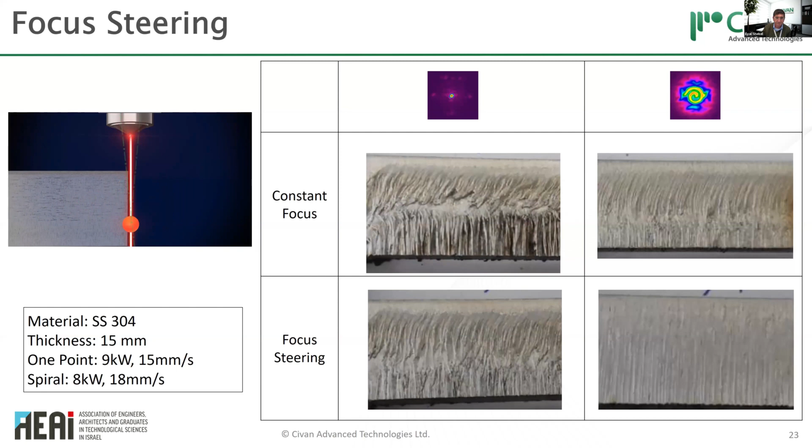In summary, we showed you 4 categories of dynamic beam shaping: the ability to do any beam shape we want, change the frequency of these shapes, do a sequence of shapes, and do focus steering. We believe this dynamic beam shaping opens completely new opportunities not available today in material processing. There's a lot of research and optimization required for every process to get the right beam shape, but our laser allows very easy adjustment of the beam shape to whatever is required.

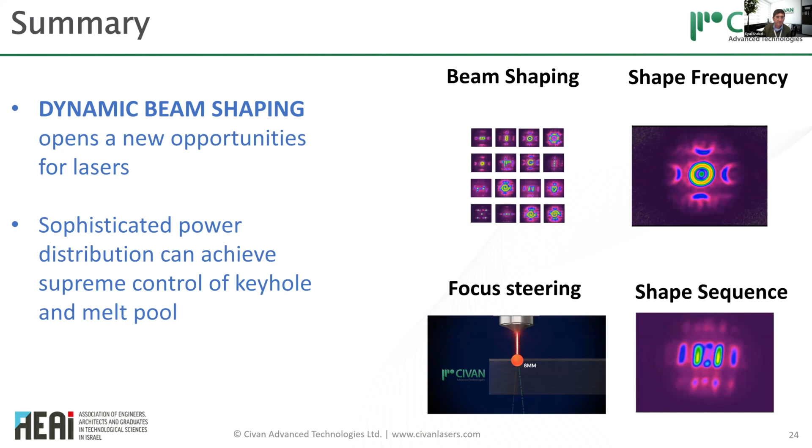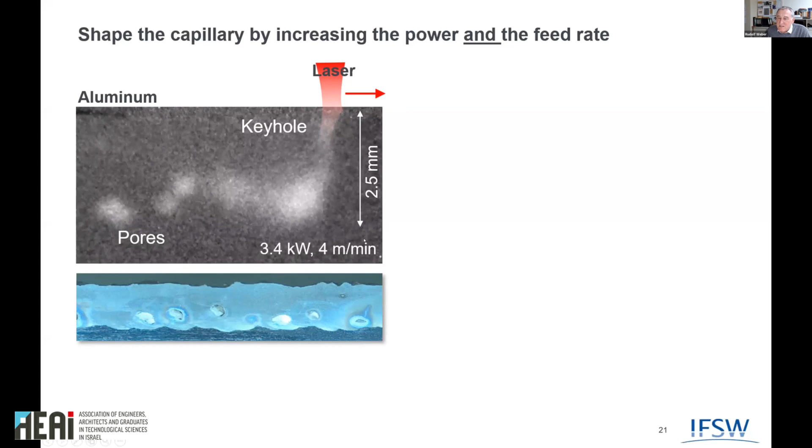A few kilowatts for a few meters per minute, and then you get these ugly welds. And what you need to do is increase the power by a factor of 5 and the feed by a factor of 10. So the efficiency is getting better.

Anyway, so we went up to 16 kilowatts, 30 meters per minute, and then we had this weld. It's about the same welding depth, this nice capillary with a U shape. Everything is more or less perfectly stable. So you see it's about a factor of 5 in power and about a factor of 10 in feed rate.

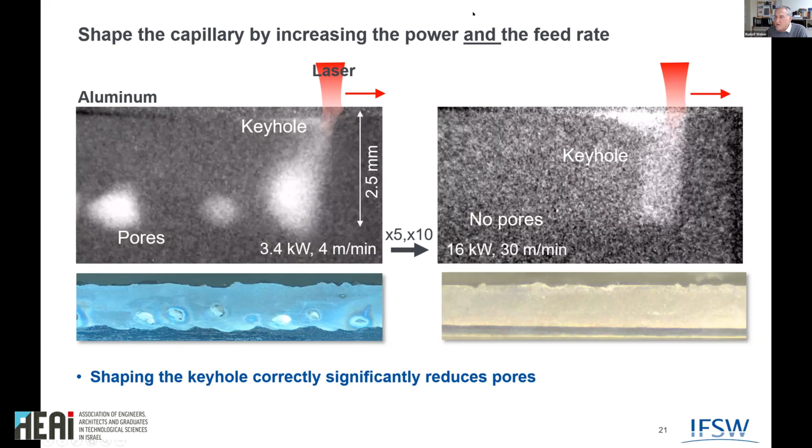I would like to ask you, isn't there a limit for weld penetration? How can you stabilize the keyhole? Stabilizing is always the problem. Even if you move much faster, you get the phenomenon called humping, which means the surface looks like it has a lot of bumps on it. Also, if the keyhole is deep, it must be big enough. You've seen the emerging vapor. If it's too narrow, you get a lot of instabilities. If you make the keyhole wider, you can make it stable even if it's deep.

This is one of the reasons - and Eyal is here, but I would say this even if he wasn't - this is why you need to shape the beam. You need the fast possibility to adapt the beam shape and focus position to create a stable system. Otherwise, if you cannot open the capillary, if it gets narrow, it shades the laser and it gets cold below. It sucks air in, making pores. So you really need to adapt everything, in a first attempt just by doing something periodically.